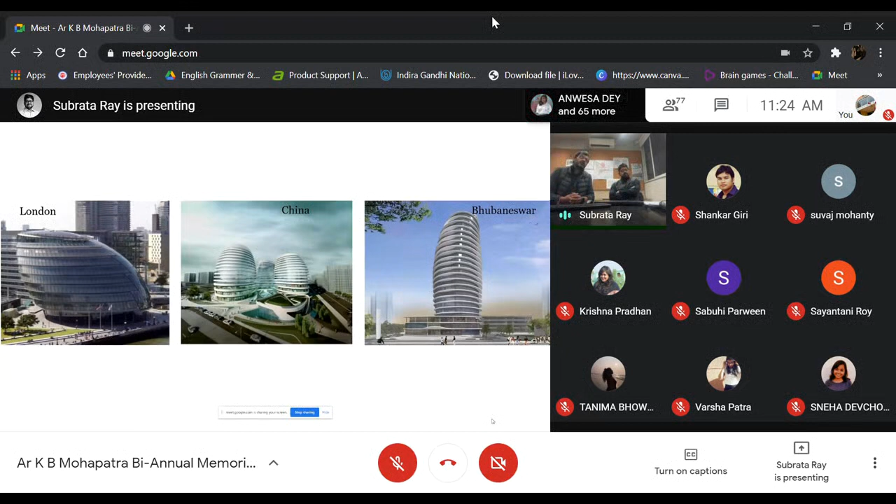Yet as students or even as practicing architects, we just get bombarded with buildings happening in places like London or China. I think why Bhubaneswar, because this was some proposal for a particular building there, and we just make a glass box building, and we get into a space of thermal shock, because we've created glass and we are engaging so much heat.

The idea is that we always look westwards and try to get an answer. No, the idea is to look inwards, into ourselves. I think we're missing the context somewhere. So we have to look inwards, which is why context becomes decisive for us. Like which climatic zone you are in, which geographic zone, what craftsmanship, we need to celebrate that context. It's not about mapping an image from somewhere and creating a facade. The important thing is to celebrate and understand the context and what this context means to us. This is the framework we like to follow, and you will see how it was developed in a project like Krishi Bhavan.

We feel yes, we need to be out of the box, yes we should be innovative, every architect aspires to do that. But can we be frugal? Can we be very basic about the innovation? Can we do more with less, using less structure, less embodied energy, all of that? But can we create more out of that? Can we be low tech instead of high tech?

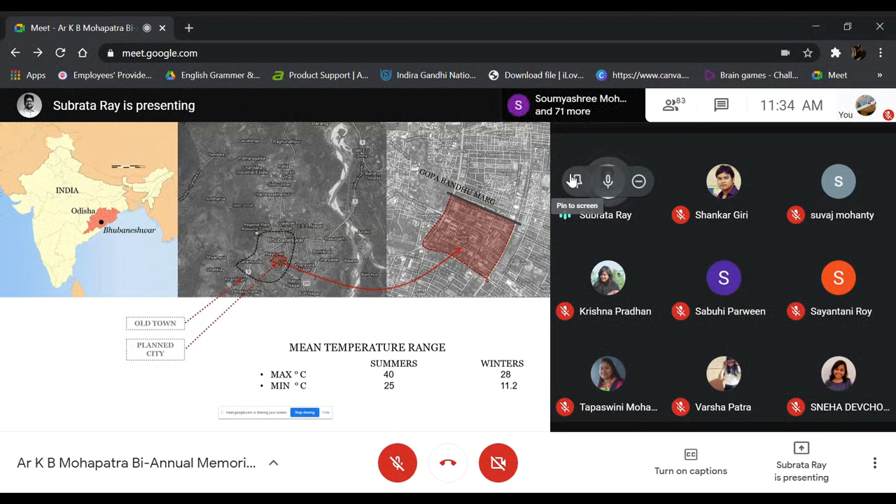So I'll take you to the project. The project is within the planned city—I think a lot of you know where it is.

Just to go with the basic things, like when we talk about creating an environment, or how we look at any project, obviously in terms of sustainability and all of this—this is what we first study: what is given, whatever things are given to us.

We consider it like a kind of dictionary—the climate, what is given, what local material is available at this place, what are the existing building scenarios, because we don't want to design something alien to the context, and the history of Bhubaneswar, the legacy that city carries.

And also in terms of the urban design, how the city interacts, what is the local scenario, how the people, their life. Before even going for the design, it's very much important for us to understand all of these things, because this gives us a direction how to think, how to take this project forward.

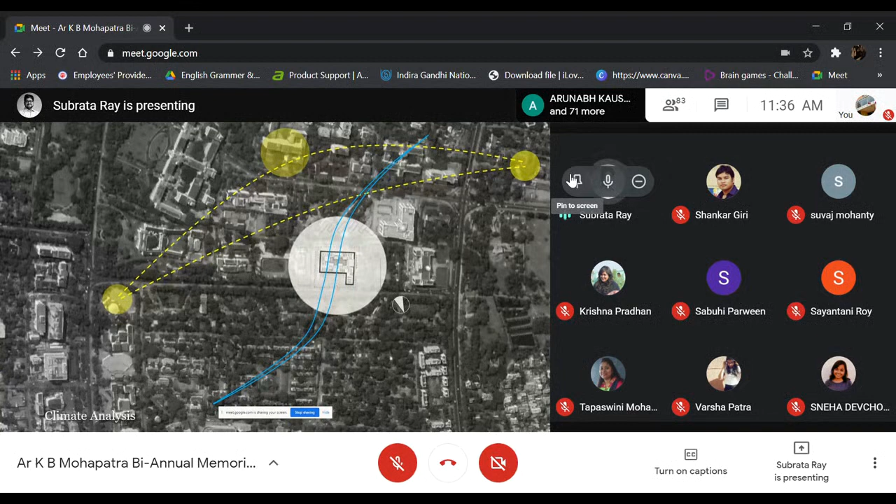So obviously this is how the site is, how the wind flow and the sun direction, and this also gives us an idea of how to position our building within any site.

So the brief which is given to us, basically it's a building for the agriculture department, and it's a place where farmers can interact, get educated, there is a space for training, and whatever questions they have get answered. Basically it's a space for people, and at the same time a space for the state employees also.

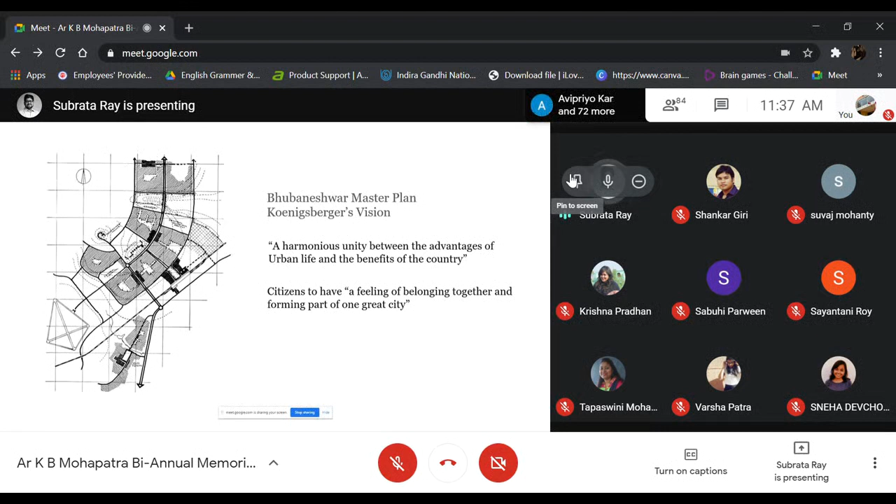So whatever the vision of Bhubaneswar is, it's almost like a belongingness together. People want to interact, the nature of the people, the way that they are living, all of these things - that togetherness is one of the basic things which we identified.

Based on that, we created this - whatever is given is what we are offering to the people. So the third question is, this is what the client has given to us, but what are we bringing to the table?

So the third thing is the citizens of Bhubaneswar, to whom the building becomes - and we thought, can this building be like a public destination? Can the people celebrate this building? Can they feel happy, proud about the building when they visit it?

So that is where the thought came into our mind, and then we thought about how it can be something different other than normal office buildings.

So whatever building exists there, it is almost like a gated kind of scenario where the building is standing, and it's a gated complex with a lot of security and all of these things.

When people pass through this road, there's a difference - that gate is a difference. These are places where high level people are sitting, and the outside people are separate. So we wanted to break that monotony, and we didn't want to go with that typical thought of what is an office, what is a typical government office.

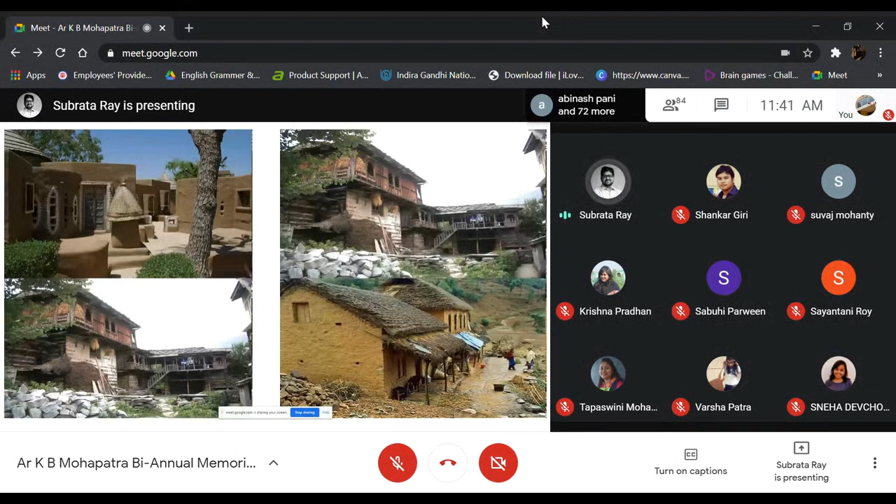So the villages and how they work and how they got developed over the years - all of these things, as Siddha was also saying, it's not always about high tech. It is all about low tech and how you present it.

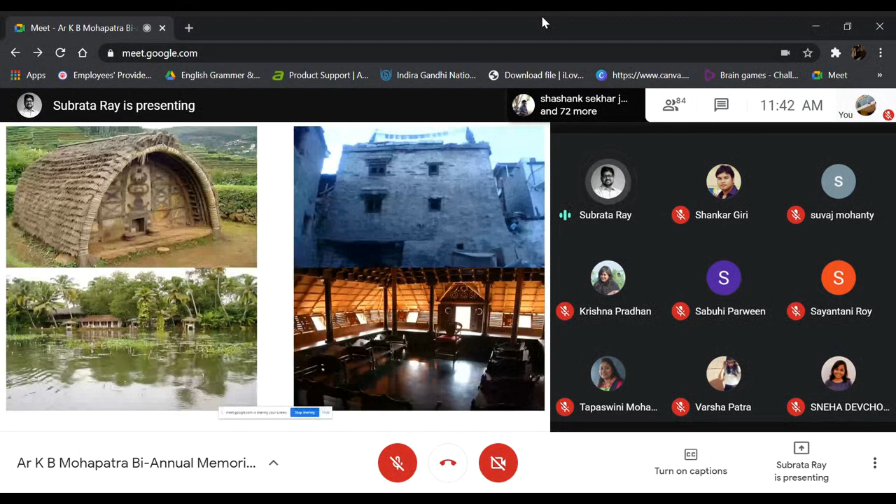Basically, it's always about thinking local and acting global. That's the concept we follow - how one single basic material can bring something very drastic into the design. So we have so many things available to us.

Even if you see the initial when things get designed in the early days, people had so much consciousness about the design, about what opening to have. And then suddenly because we are adopting the Western culture, we lost all of these things. So even in terms of the culture, if you see the architecture of it, it's something very drastic, and we feel proud about all the structures.

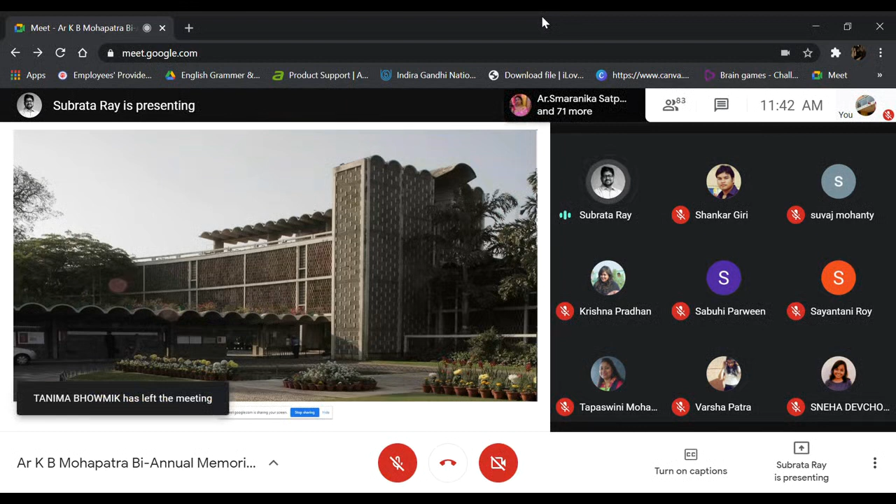So the only thing is, we should not go with that single thought of copying international architecture, which we always try to avoid in our practice. Maybe we get inspired by all of these things, but our thought is what next, what difference we can make. Because when we talk about any office building, it always comes to mind as a glass box with some composite panel. So we wanted to break that monotony and go beyond that, beyond architecture, to what we can offer to society.

So then we went back to the drawing board with the thought of what is available to us in terms of context and in terms of our culture. Our role model is always this thought of conscious design. Whenever the team gets involved, I also tell the students, whenever you go for any design, you need to be very conscious. It's not about the end product, it's what you set to do at the initial level. As a conscious design, the best practice covers environment, social, and culture. These are all the things we wanted to cover within this project.

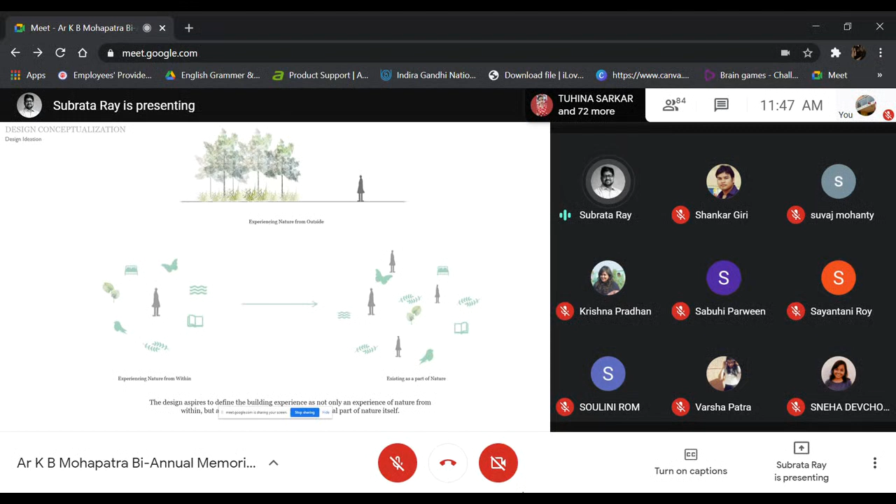When we design anything, one approach is to design people and nature separately, but in our thought we wanted to combine both things together, not with people in the center and nature surrounding. We wanted to come up with a solution where people and nature go hand in hand. So it's always an experience, you're within the building, sometimes outside the building, but you don't really relate to wherever you are, it's merging into nature.

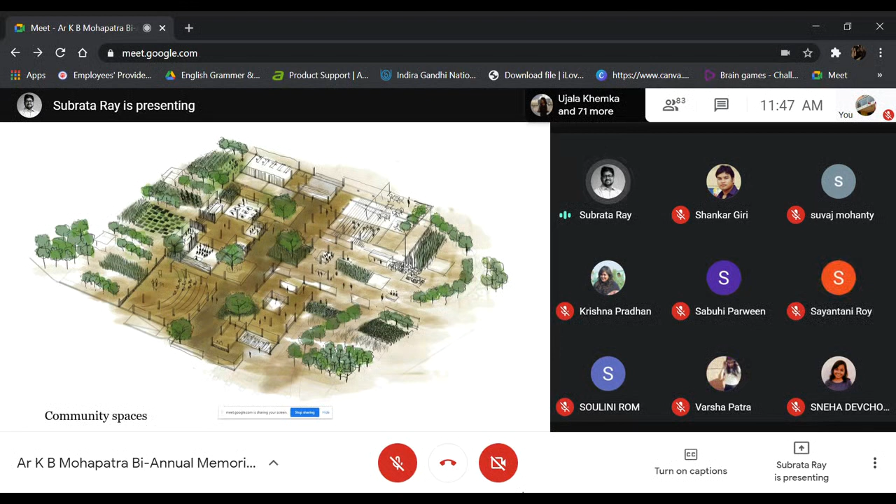That's how we came up with this ground portion where the courtyard and the usable space give an inside-outside feeling. It's not that you're only within a building, sometimes you're out, sometimes you're in, basically within nature. That was one of our concepts. Here we intend to include public services like an auditorium and a training center, which are important for the farmers to get educated, basically all public facilities.

So I'll just go through the plans. When we started this design, the only thing per the direction was that we wanted to give some foreground to the building, because that is also important - how you view this building from where you are looking, and also because of the north direction. So we wanted to open this whole part, the northeast zone, to have more openness.

So we wanted to get this north light and all of this stuff. That allows us to bring in terms of like the tree cover, the shaded cover, and also this helps us in terms of climate, like the water body which brings cold air to the buildings and all of these things.

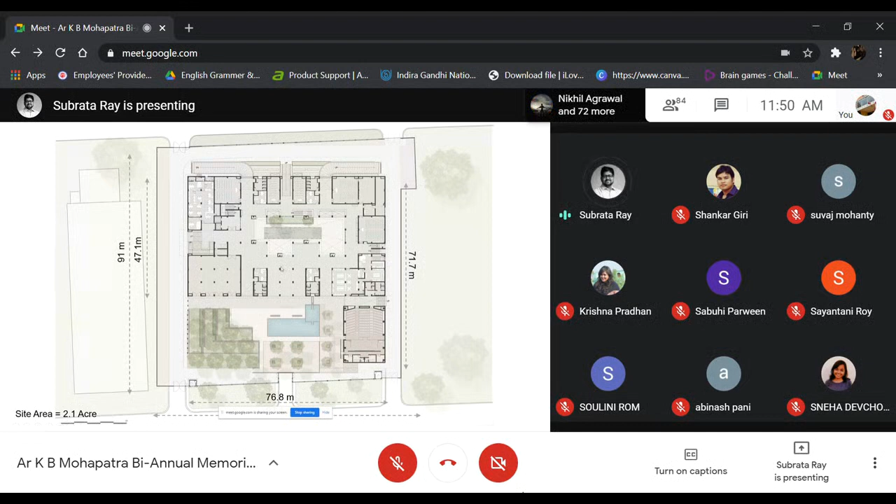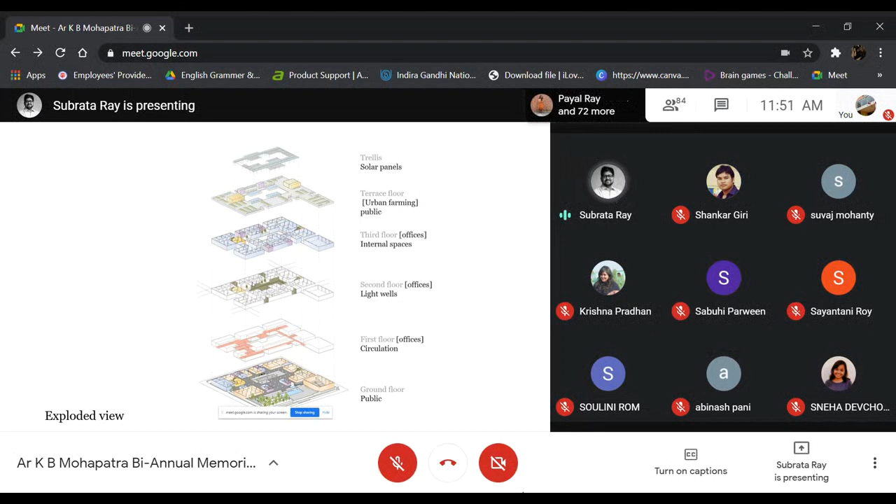And we kept the circulation very simple. If you see the upper floors, the circulation is inside within the courtyard. Around the courtyard, we have all of this circulation. So you always feel fresh, you get good air, and the building also in terms of sustainability acts very well.

So this is what is the basement. Below that - I already explained to you - the auditorium, the cafeteria. So all of this public things which is there on the ground.

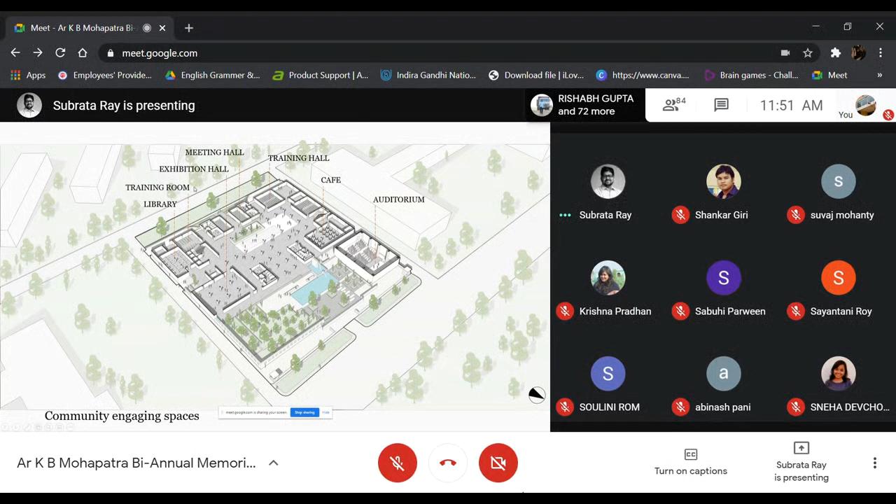On top of that, the circulation - I already told you we kept the circulation very simple. And we placed some of the office building like when it is inside the court. So some of the offices are also facing inside, so you are getting light from inside and from the outside also.

And wherever you are getting light from the outside, we have introduced that screen which gives shade to the glass and all of this. So this is how almost the typical floors are similar across the different departments.

And in the roof, what we have tried is more like solar panels, and we intend to do a lot of greenery because that gives us the opportunity to make the roof cool. So it was not possible to make all of this roof green because we need to have a circulation area, but wherever we had the opportunity, we made it green.

So that is how it looks like. This tree line in the front creates a kind of microclimate for the structure. So in terms of the section, this is how it is. So I'll go in the...

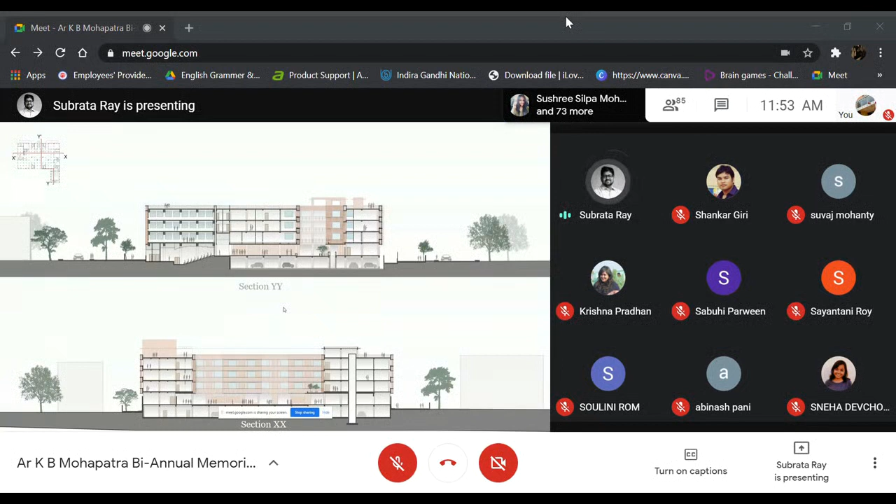We can avoid HVAC in this building. And when that thought came into our mind, we started thinking what is available then - if it is not AC, then what is available? How can we make this building comfortable without HVAC? That single thought gave us the clue for the design, how to design and how to go about the whole process.

And the material we wanted to use, which is timeless, obviously, and low maintenance, because we also understand government buildings need low maintenance. So we particularly chose all of this material which needs low maintenance. How we can bring like 100% daylight to the structure - one is your shading device and the openings.

We, as I told, we don't want to go for a glass building, but at the same time, we don't want to compromise with the daylighting. So how to make a balance out of it? So you are getting light also, and your energy consumption in terms of the building is getting less. We are a more energy efficient building.

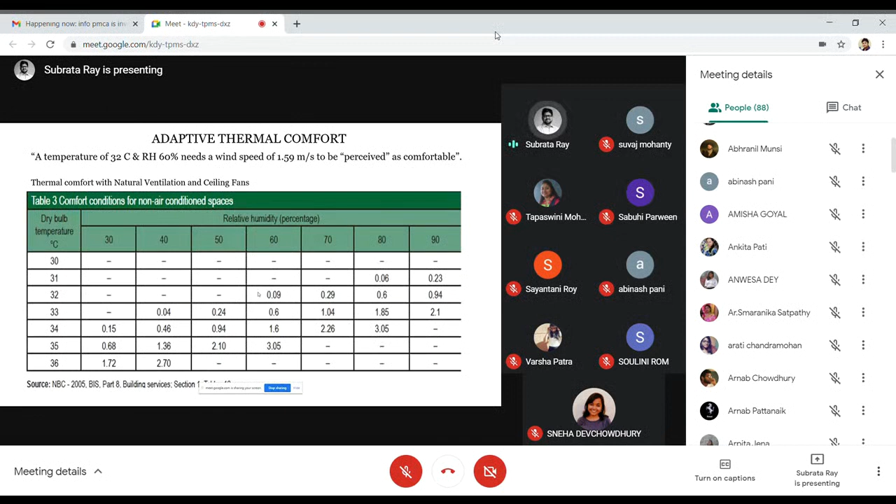And when we went on with our design, we thought, what is the comfortable temperature in which we can design? So the building is designed with 32 degrees centigrade in mind. So how we can achieve this kind of comfort, and what we need technologically to devise or do to achieve this figure.

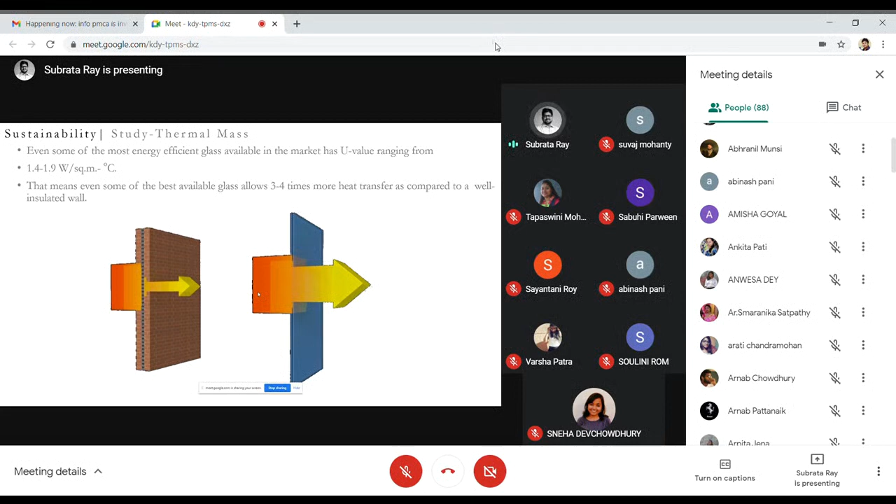So this one thing I just wanted to explain. When we talk about any glass building, and when we talk about any wall, it's always our conscious decision how much glass is needed - whether glass is needed or not. So the first thing we asked ourselves is: what is that window and what is that opening we really need to get in light?

That's why we don't always go with the thought that the building will always be like glass. If you see the heat gain studies, the heat gain through glass and through the wall is very different. Even if we consider very high U value glasses, you are still exposed to the structure, exposed to the weather, and that temperature is gaining inside. So all of these things give us what window we need to see, what opening we need to see, and all the parameters of the design.

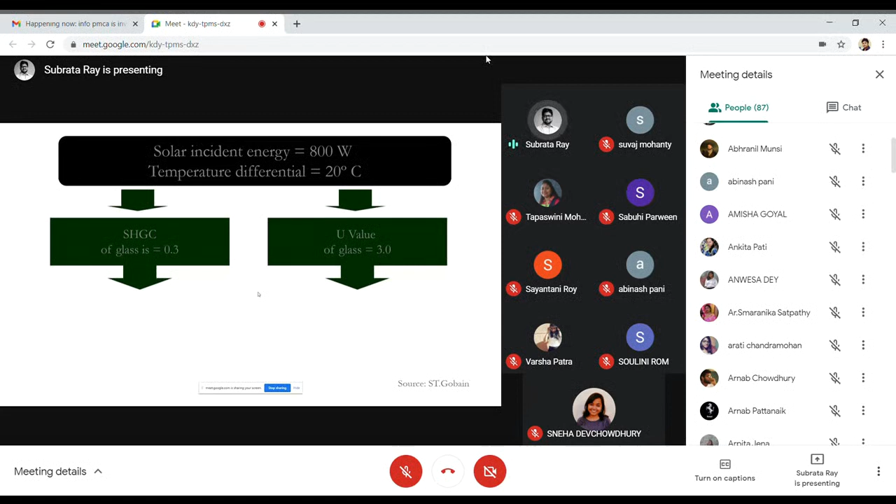It's not that I'm explaining all of these things without reason - all of these parameters mean we first need to create an environment, what is our thought, before even thinking what design we need to produce, or what core values we wanted to go with. In terms of glass, how much wattage and how much electricity we are saving - so...

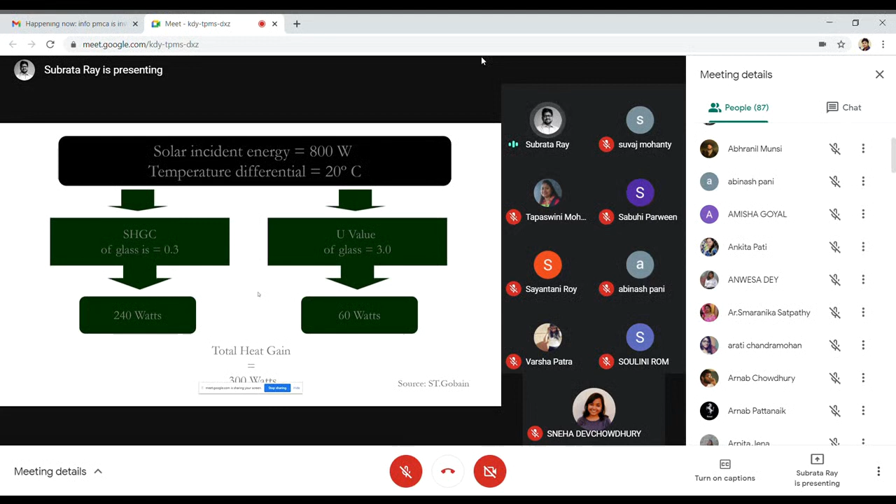And then the design comes from what is important. It's not always important what we want to achieve - it's always the process which is important. So when we decided we wanted to go with very minimal glass, the question was: is it enough to get all of these things? What else can we offer?

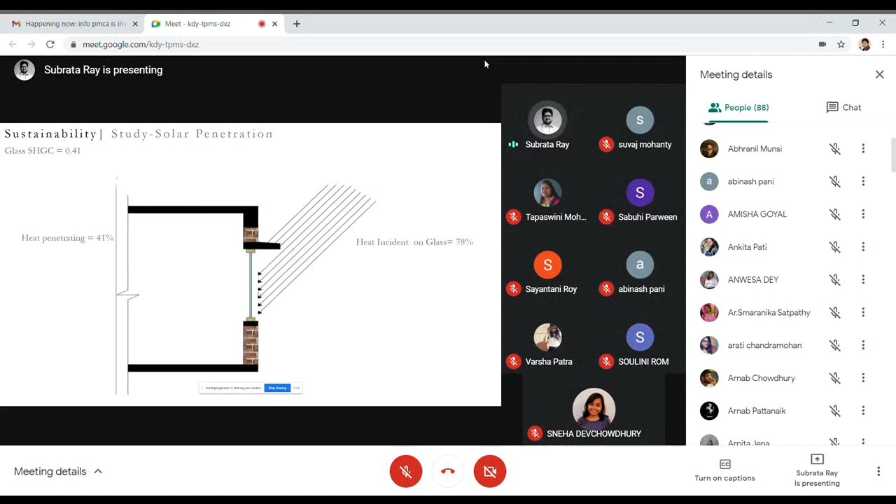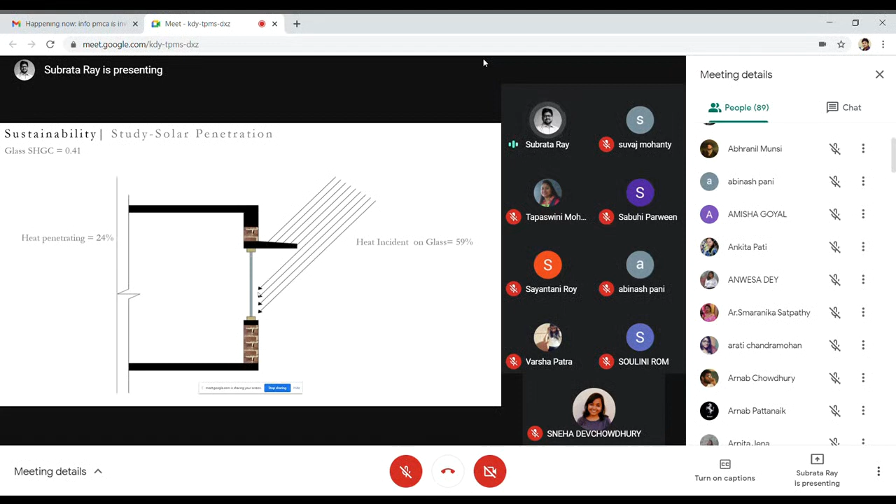Obviously as passive design, we can offer something like a sunshade, which will be more effective. If we increase the sunshade, it will certainly reduce the temperature - you can see the temperature coming down from 41% to 24%. Maybe initially you won't like how we are introducing a chhajja to a design, but that's what I'm saying - it's a process of design, so we're not worried about what is coming out. We always think about how the building will perform in the long run.

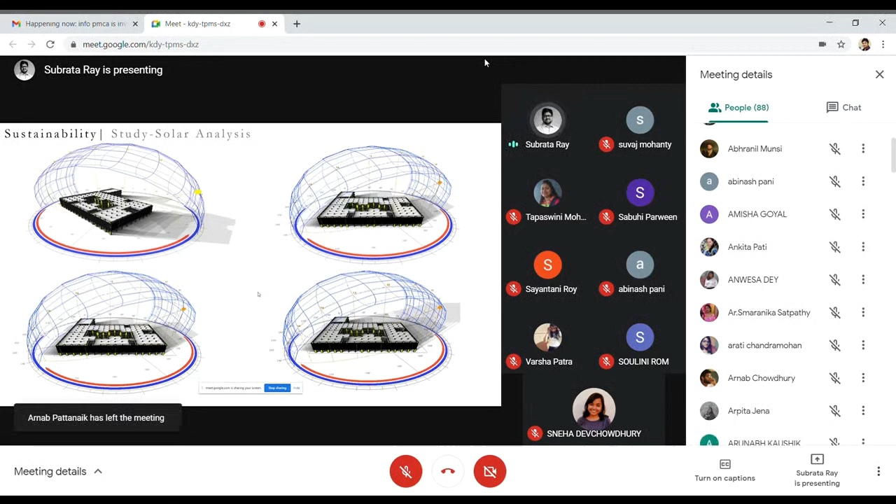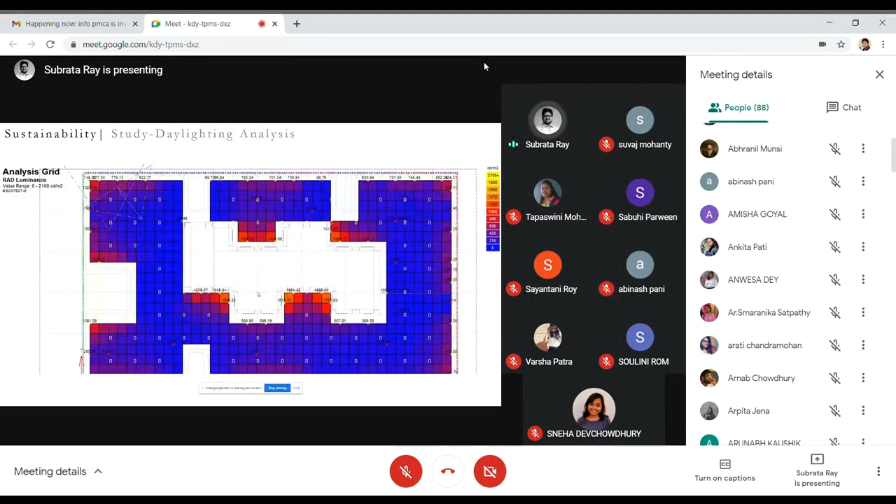Then we have done a lot of studies - solar analysis, how the building will act in terms of mass, where we need to give deep chhajjas and all of these things. We've done a lot of analysis, and this is the simulation model showing how much light we are getting. Even with a very small window, we can see the lux level we are achieving - very good daylight throughout the building.

So this is all of the study which we do before even finalizing our design in terms of the facade and all of these things. We first need to have comfort in terms of how the building is acting, in terms of technology or in terms of comfort.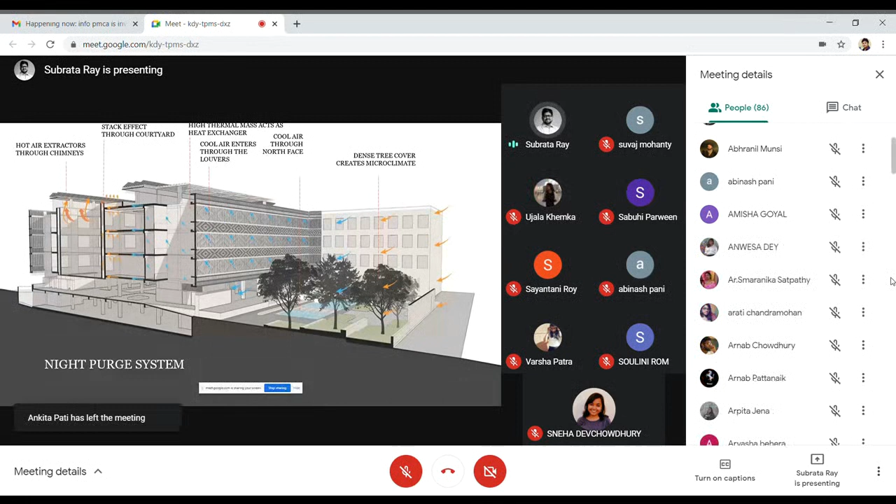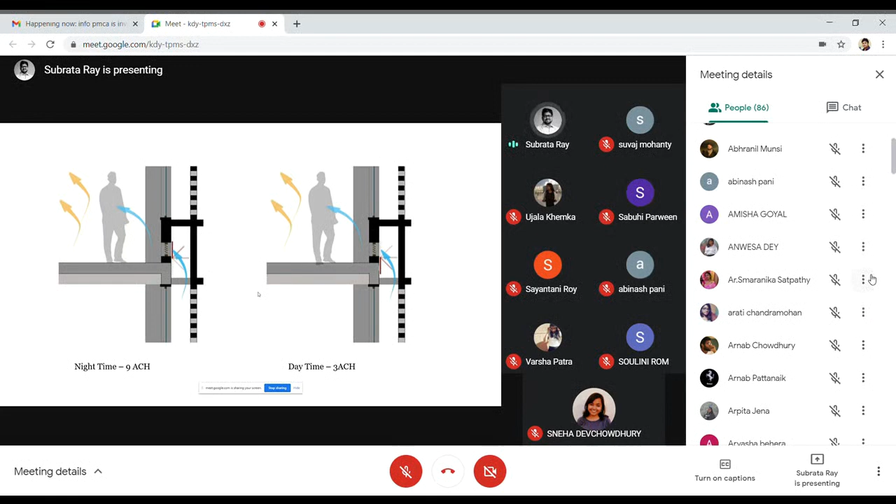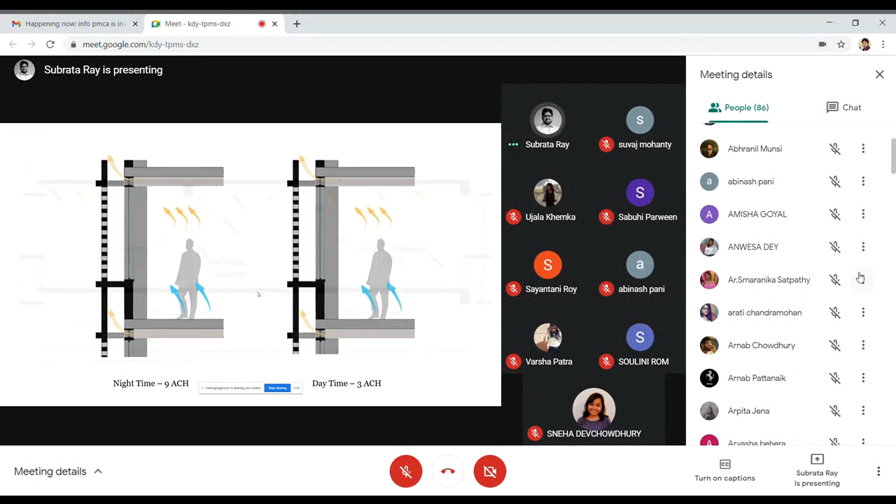So this is how we have created the small louvers in the bottom, where all the cold air goes inside and the hot air goes out from the building. This is how the building is acting. This is a clear-cut wall section.

Now, how these fins basically act - before even going for the design of the fin, we just studied how the fin will act, because basically these are all fins. Behind that it's like a small corridor, so it is giving continuous shade to the structure. So even if your window is open, you are not getting that much glare, and in terms of heat, it is totally like a shading device.

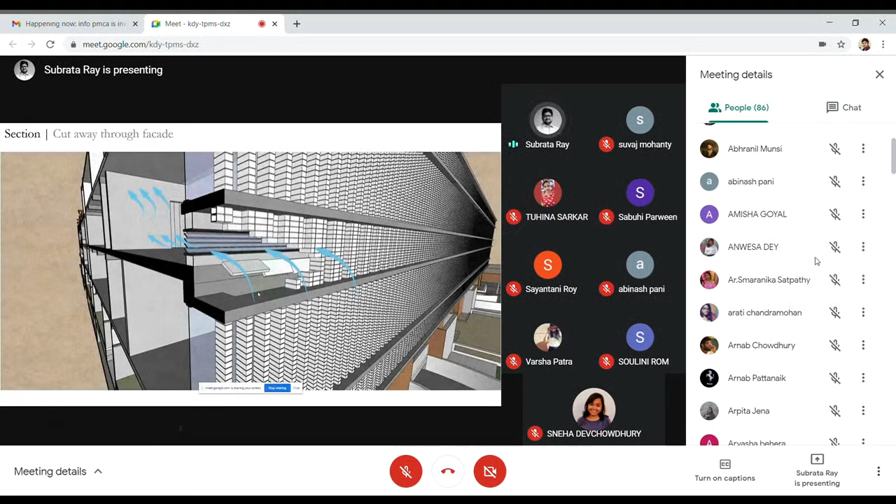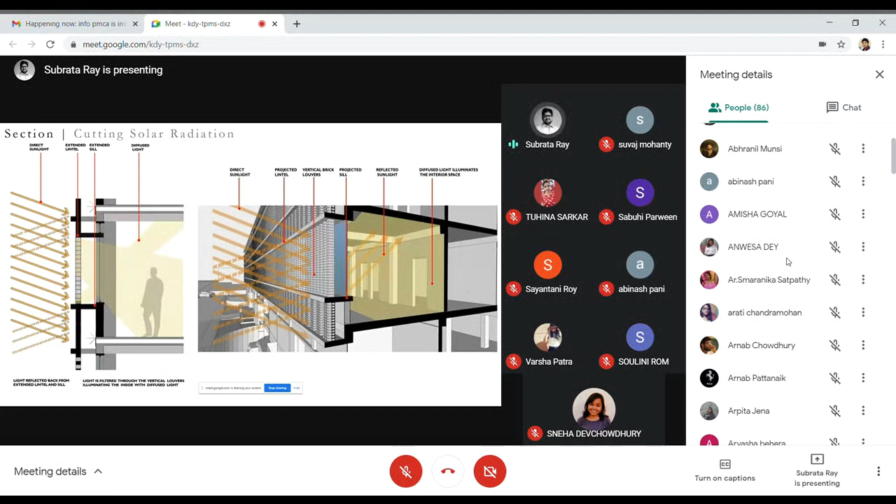And then how it is acting in terms of cutting our solar radiation - that was what I was explaining, how it is cutting our solar. So even in terms of this, these are the small louvers which we have introduced. And even if you see from inside, it looks like a very simple building, which is very easy to maintain. You are getting proper light.

And all these small windows are not visible from the outside. So from inside, the interior is all a very simple building, and with that fin and all, we can make a difference to the temperature. So if you see the outside temperature, it's suddenly reducing by like 3 to 4 degrees.

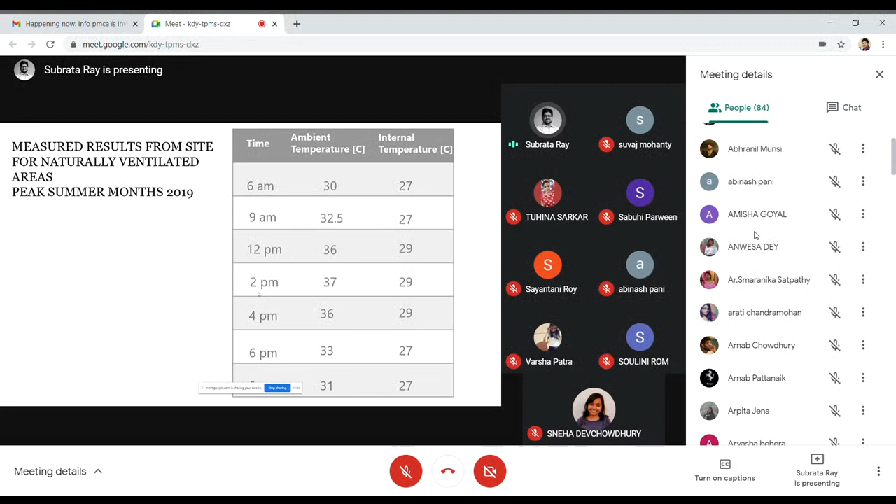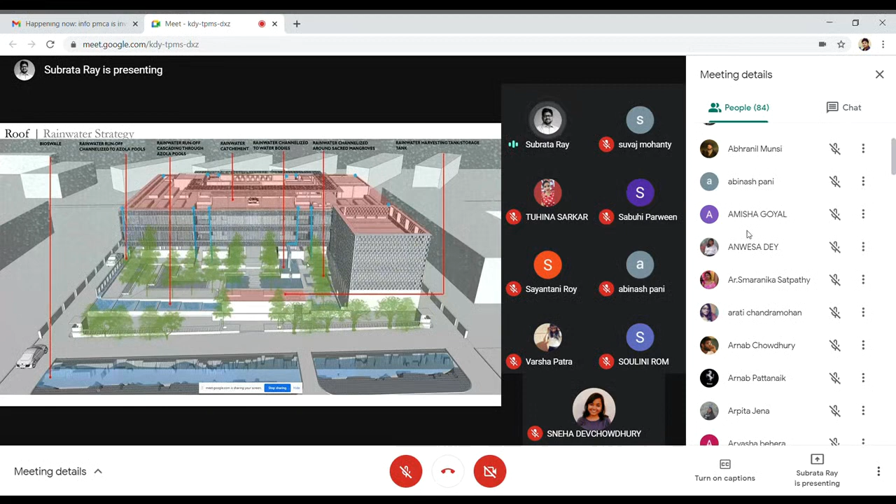So even in terms of how we are using our landscape - on the external side we have a bioswale, and we are collecting all of our rainwater and channelizing all of this water, and then we are actually collecting it into a pond, and that is one of the features of our design also.

So when we thought about what expression we need to look at, rather than creating a new context, we visited what is available to us - we always talk about the context. So other than bringing some new stories to the place, we went back to our cities and looked at what soil is available, what color is available.

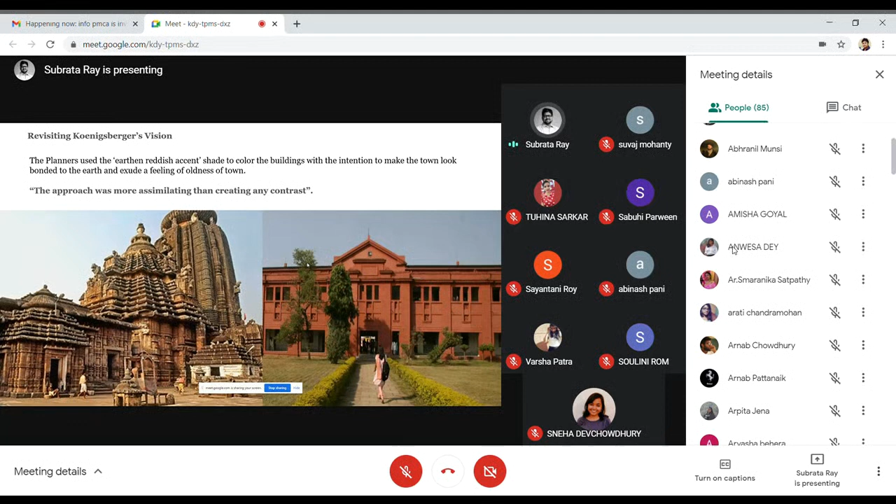So this is what we found - Orissa has very different colors, like the soil color, each and every part of Orissa is very different. So the thought is, why can't we bring all of these things together to make a statement? It's not borrowing something from outside, it's the local context which we wanted to highlight in a different manner.

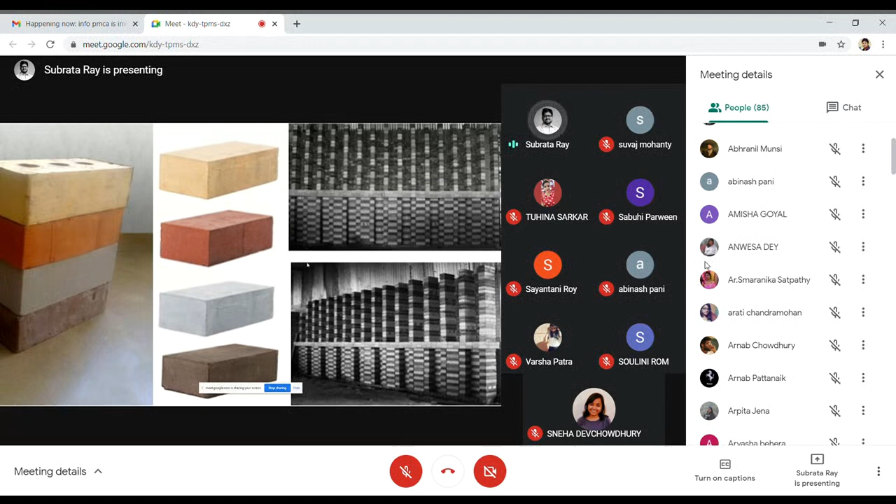And we are very proud of Ikkat, it is one of the signatures of Orissa. So we thought, let's combine both things together, the natural things and the culture and the art. That is how we came up with the option of making four colors of brick, which gives us an Ikkat pattern, and from that we make a statement for ourselves. So it's not about borrowing anything from outside, it's looking inside at what is available with us. That is how it looks, and at the initial level, we thought about how to construct it.

So we have never thought that's how to do it - that was not the thought. It is always important for us to think about what to do. So then the how comes as research. Sometimes for maximum of our structures, we don't even know how to construct.

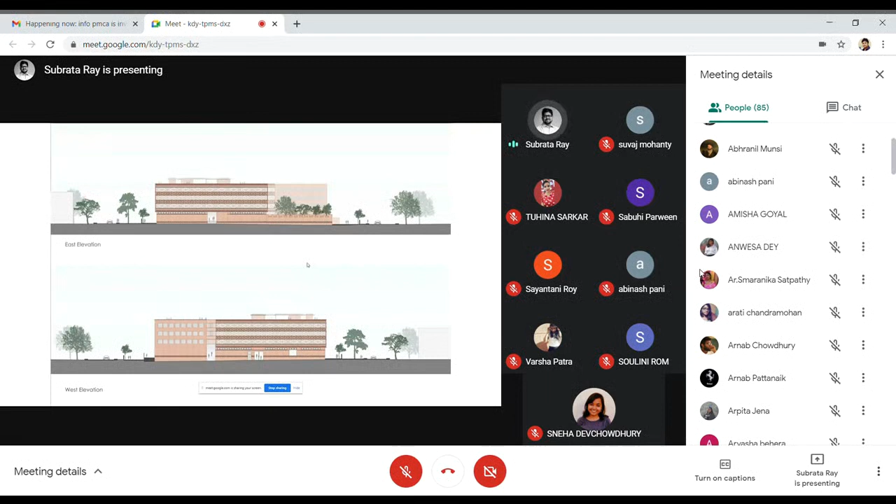So it's a process - we do a lot of prototyping, a lot of alteration, a lot of research. And that is how we work with a lot of craftsmen and mistris and laborers, the actual guys who are going to do this design, because their understanding is much better than us. So then we evolve the design on how to do it.

So that is how, till the time we do not even know how to construct these things, we come up with the option. We have done a lot of prototyping, and then we find out this is possible, absolutely possible.

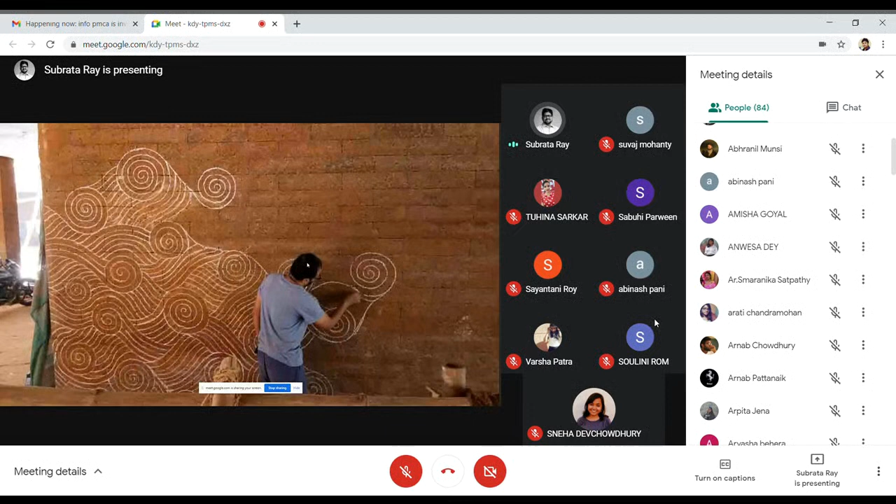This is Shivanand, with whom we have interacted and explained the project, and then we came up with the option of how we can bring craft into the picture. It's not about working in isolation. It's always about working with the craftsmen, because they know how to go about the thing. So we came up with options for where we can bring craft here.

So we worked with this local stone, and that's what we are saying — it's beyond architecture. We can't restrict our thought. Sometimes we need to go beyond, and then we can see what we can offer, because if as an architect we don't offer, if we don't want to go for any craft, these things will not come into the picture. So this is our responsibility. We feel it's our responsibility to bring all of these things into the picture.

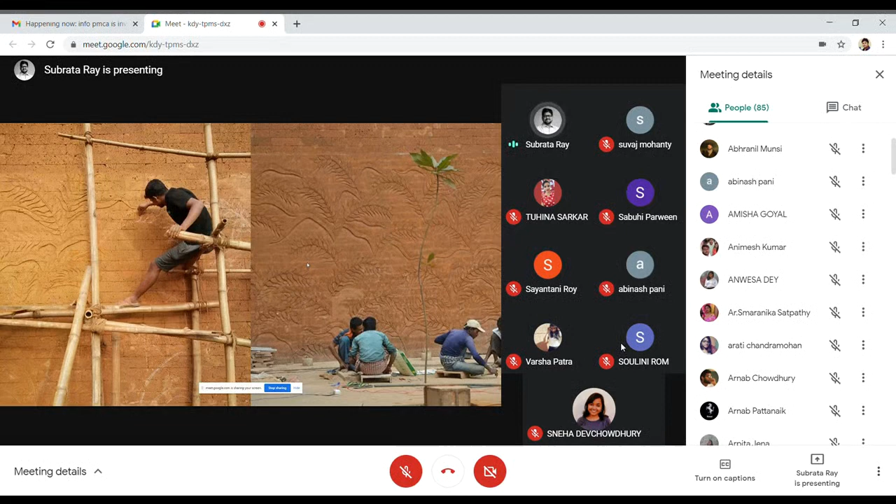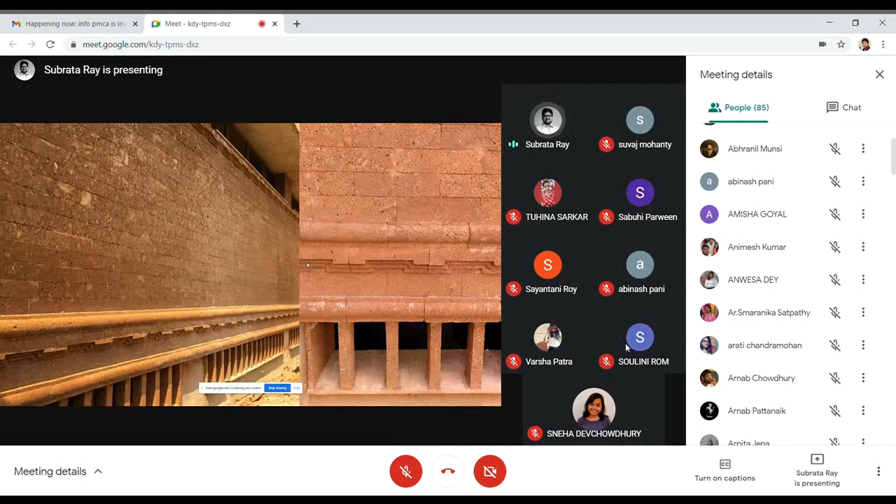So there is a lot of craft, and the building itself has its own language. It's a single tone, because we wanted to make this a very simple, single-tone building. We didn't want to bring too many stones into the picture.

We talked with the craftsmen, who till then always believed all of these crafts could only be possible within a temple. When we gave them the opportunity, the first time they were surprised — how can you bring all of these things into a building. So for us also it's new learning, and for them also it's new learning, and they are so happy.

We are giving them some places, because all of these bottoms and these spaces we need to create for them to allow the craft to happen. So this is what we started exploring, in terms of the railings and all. Then it's a different thought, after we designed the complete things, of how we can bring craft to the project — a different exercise altogether. And this is how we explored it.

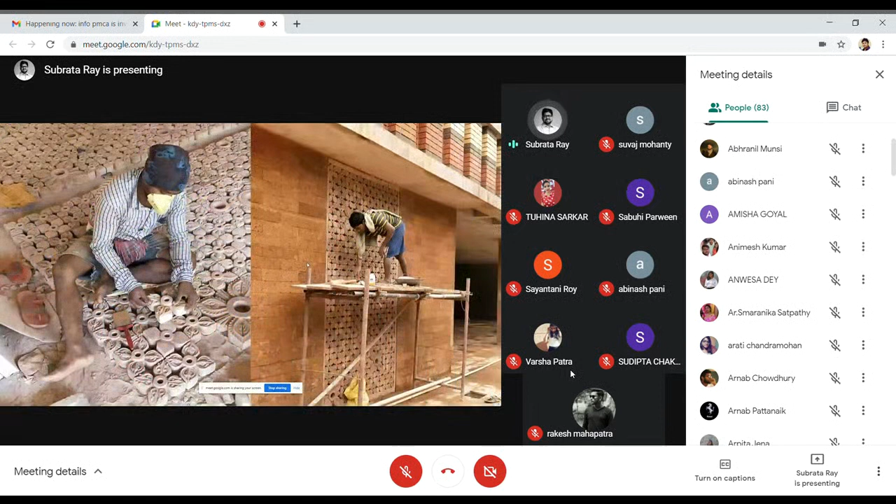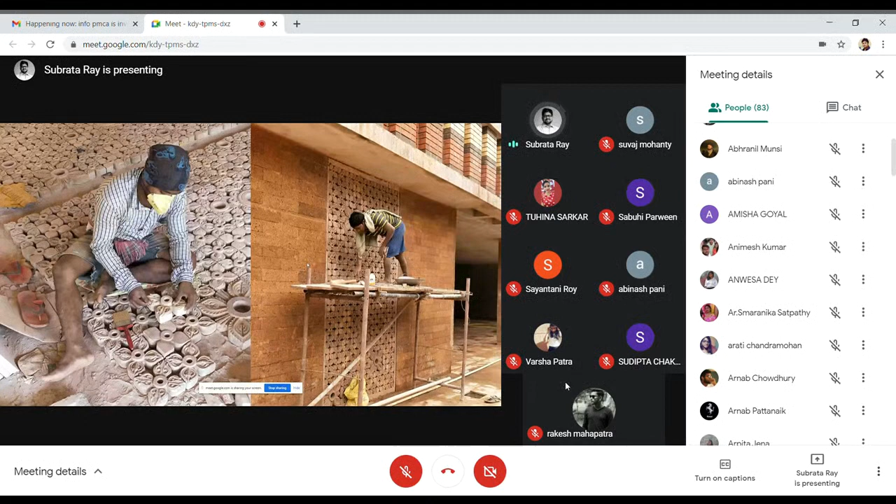Yes, so there's a lot of craft. We have done a lot of prototyping. This is a prototyping which is going on. Even we weren't sure initially how it would happen, but with a lot of process, and when we worked with them, it happened.

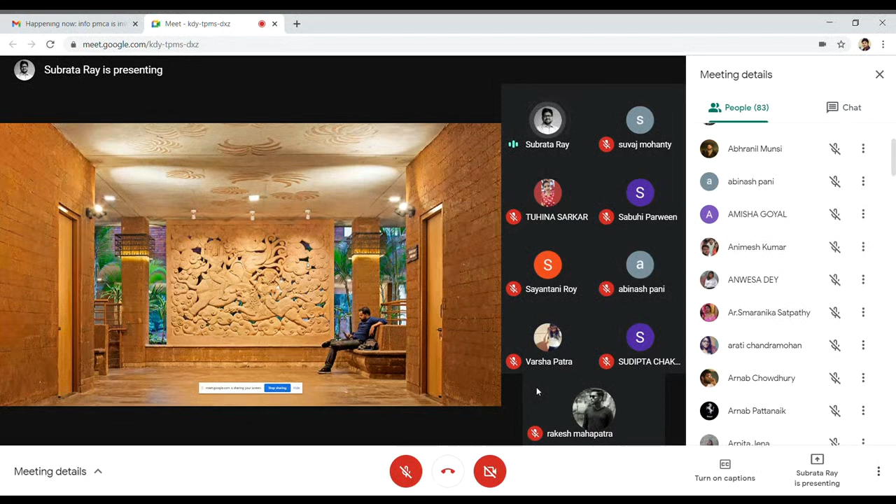We at Studio Lotus feel very happy when we look at this building. It's so celebrating — all of this carving which is very close to your heart. So whenever the culture emerges, it is part of each and every space. This is the front courtyard.

Even if you see the slab which we have designed in such a way — we always looked at how we can offer more craft into the space, like everything, the staircase, the soffit, the walls, and each and everything. And this is how it looks in terms of the internal courtyard.

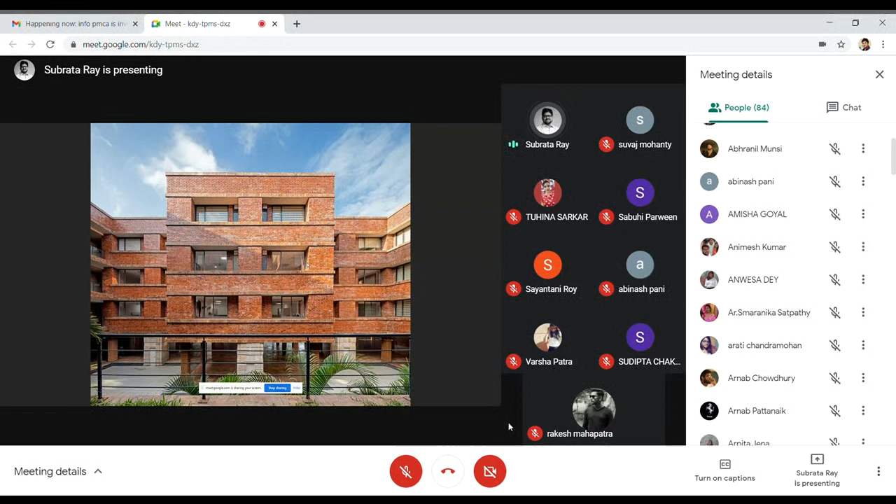It's a lot of massing articulations. So from the first day only, our thought was for the building to look timeless. We are not making this building for just some years — we want the building to age over a long time, and I feel we have achieved that.

This is how the lower portion is working. How much time do we have?

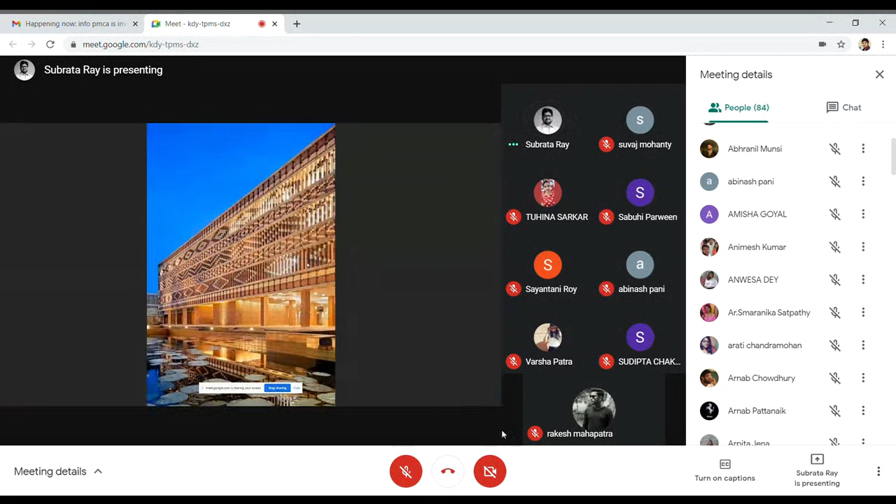So even wherever there is no screen and such, I just wanted to explain — we make all of these things, like the chhajjas, deep enough to cut down the sun.

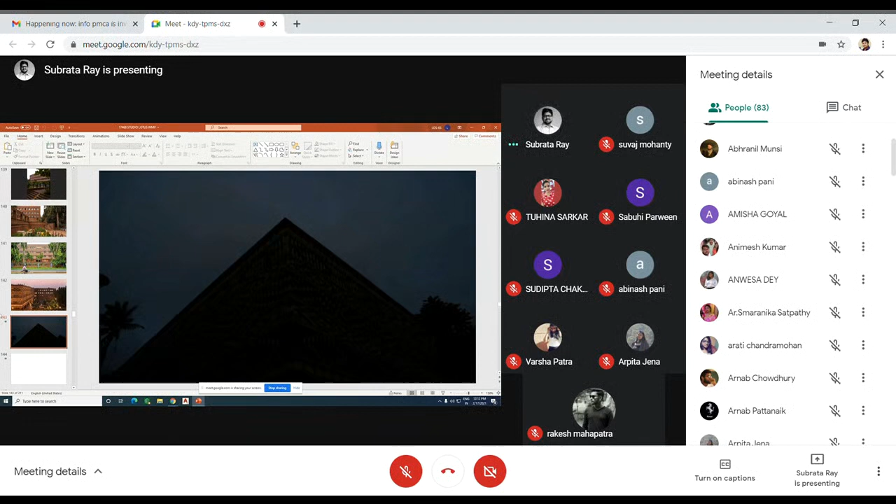Rakesh Mahapatra, would you like to ask? Good afternoon, ma'am, yes ma'am. Good afternoon sir. Before asking a question, I would thank you for providing or gifting Odisha with such a timeless structure, which we really feel connected to. Thanks to Studio Lotus for that.

Sir, one question I really ponder upon is that the materials which are vernacular and used in the structure might not be found in abundance in future. So if this building could have come up around 20 to 25 years from when it was actually constructed, what materials would you have chosen, or which materials could you have thought of in that time span?

So, see, that's what I'm coming to. It's not always important to think about what will be available at that time. When we design anything, we first think about what is available right now. That's what the question is.

You should not think about what will be available, so you cannot predict anything. Either the glass will be available, or the soil will be available. Our way of practice is we always go back to the local context, to what has happened historically and what is available in the present condition. Whenever you design anything in future, you have to go with what is available at that time. So the material, the look and feel, all of this may differ at that time.

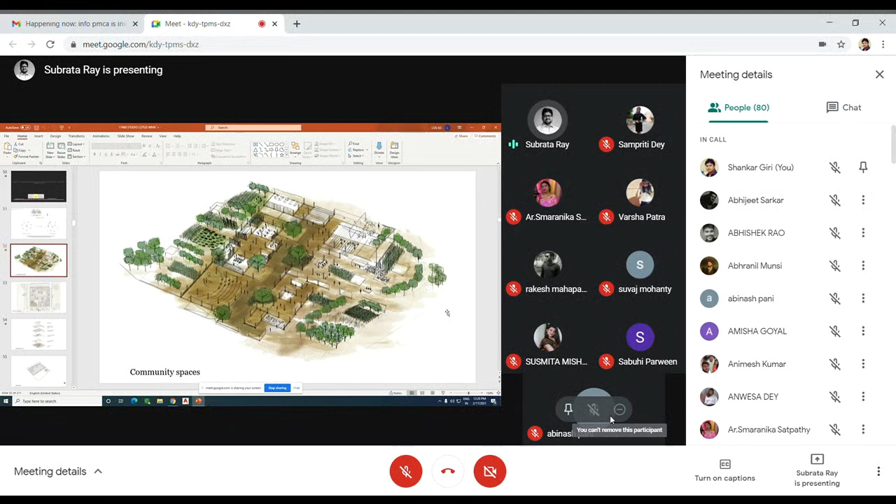So as a concept, whenever we do any project, first our thought is what native plant is available, because we don't want to bring Dubai into India, like people starting with lots of tall palm trees. First we wanted to explore how we can maintain this facility very easily, and what native plants will grow easily, rather than putting so much fertilizer and making it difficult.

So the initial thought was to make the design very simple in such a way which allows that. We don't want to go for too much hard paving, because already whatever footprint is there is creating a fair enough hard print to the site. So wherever we got a space, we always wanted to go for soft.

So in maximum places we have shown the softscape, and wherever we are creating hardscape, the strategy is to create a tree court - basically a series of trees in a grid manner, which gives you shade and at the same time makes your hard pave very soft. So these are the basic concepts we have taken into consideration.

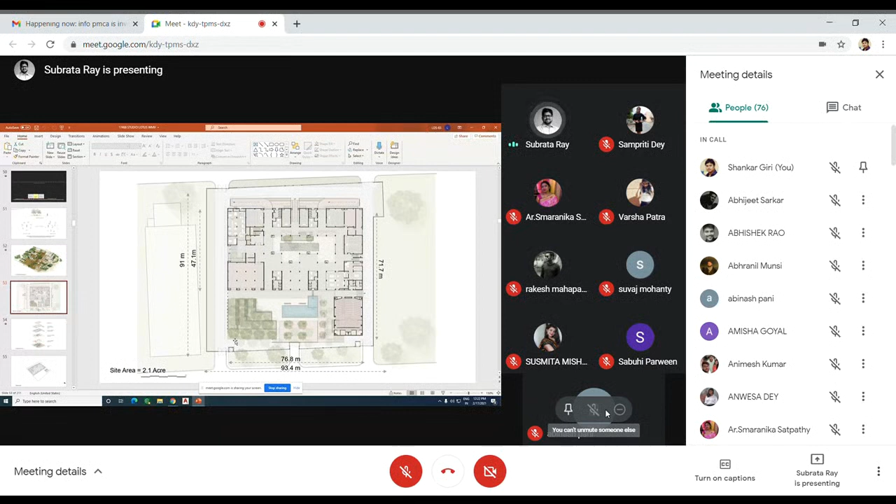And other than that, sometimes when we have this collecting tank for harvesting, rather than putting it inside, we explore how to make it a design feature. So that is one thought. None of the services we wanted to hide basically. Like this pond is basically acting as your storage tank.

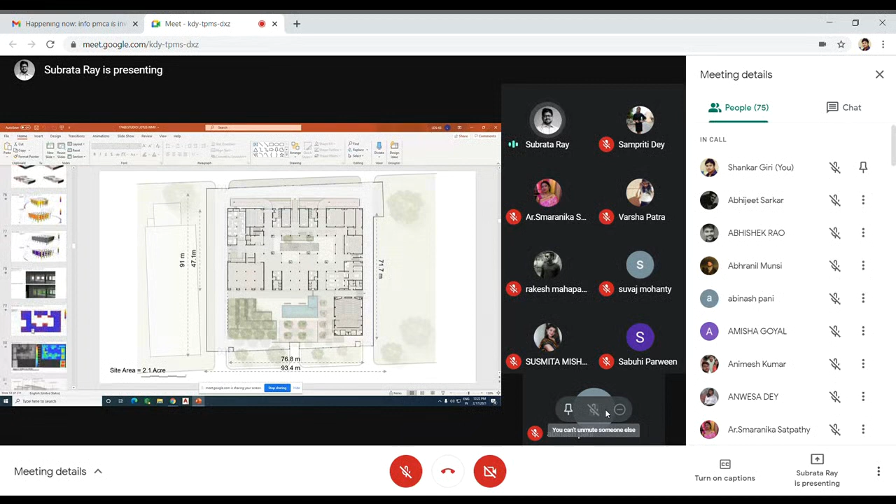So whatever is required, doing landscape is not always about making things - we don't have to do so much hard paving. Doing less, how can we do more, is the same concept we have followed for landscape also. So here also we wanted to just do pavement of the area which is required. We have introduced a lot of trees and tree courts wherever to give more shading and all of these things.

I think that's it. Yeah. Thank you so much, sir.

Even wherever we have a space like the terrace and all, we have given plants so that it's not only about thinking we have a plant on the ground floor. We have also taken it like a step profile - when you are looking at the building, you should always see these greens at your eye level also. That gives you so much relief. So it's not an isolation - we have not worked in isolation.

It's in the first slide only, I told you about that thing - the strategy. The concept of landscape is simply this: we wanted to experience a landscape rather than like a one-sided thing. Yeah, thank you.

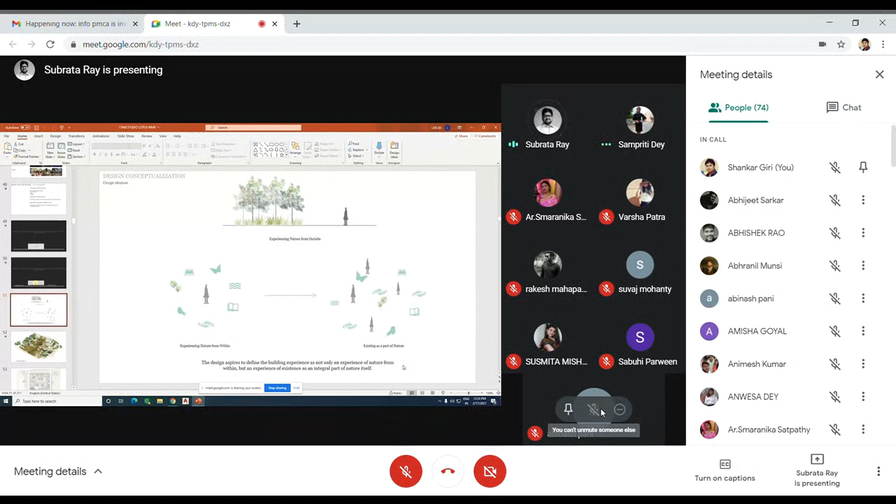Take a few more questions? We are just running out of time. Can we? Initially I thought maybe I'll show some few more projects which was there, but I think there is no time. Thank you.